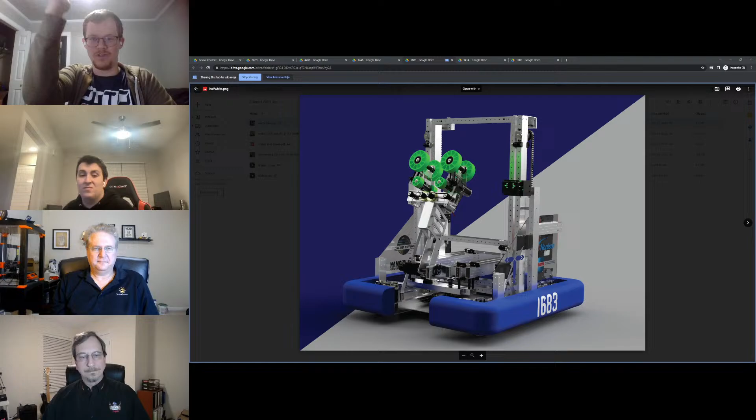Let's go ahead and start off with 1683, since we were talking about them, and they'll be playing at Albany this weekend. I think they just sent in their video from DE today, so we'll get some of that pulled up here. Again, an impressive looking robot - it's kind of an elevator on an elevator design for going straight up, straight down, and then another elevator mounted to it for going in and out, with that wrist and end effector for picking up cones. Seemed like they had that pretty squared away for loading from the human player.

Brian, Thomas, any thoughts from seeing this robot at DE? So they are running photon vision and the limelight. I'm not sure I saw the photon vision on there, but they are running photon vision on a Raspberry Pi.

Really stable, drove smoothly, so I think their speed was good. I think they'll do pretty well there. Agreed. Yeah, it's cool to see a robot working that well, even before week one, where I know a lot of people struggle to have a robot together and ready to go. So best of luck to them.

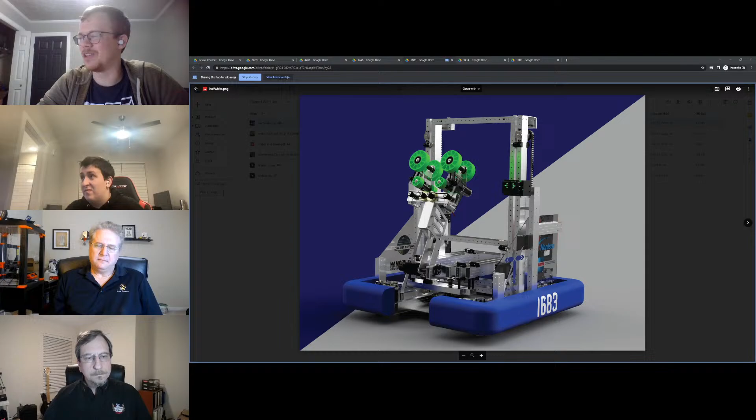Ian, I think they have some more content in the folder. I know they put together kind of a play-by-play list for all the mechanisms, descriptions on what motors, what kind of wheels and things they're using everywhere. We got an info sheet for these, we'll see if we can zoom in a bit for walking through that. But I think the teams seeing them at Albany will get the in-person play-by-play. Yeah, a quality looking robot. Again, I think there's so much to be said for getting a robot done and practiced, so there'll be quite an advantage compared to the majority of the field in having a robot ready to go and ready to play this game.

Any other thoughts on 1683? Did they have a video? Well, they got some video, right? Oh yeah, that's where they had some video from the DE session today. So we'll get that pulled up and rolling here. Yeah, I was recording them because I'm like, hey, they're doing pretty good. Check them out.

I think something to note while Ian is working on getting this video to play is they cannot pick up cones in any orientation off the field. And I'm just really curious - I know we talked about it some in the beginning of the season - when it comes to congestion, if all these robots can only pick up cones when they're perfectly straight up and down, how congested that human loading zone is going to become. So I think that's just something to keep in mind for teams as they're planning out how those matches look.

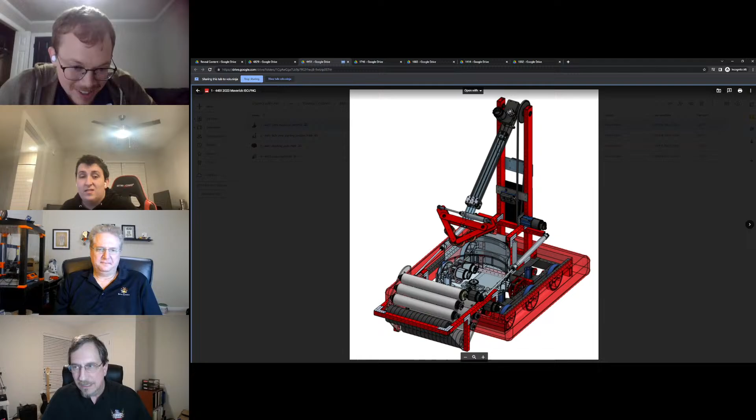Sure, so we are not quite swerve ready for a highly dominant swerve game. So forget the lamenting, we decided that being able to pick up from one side and score out the other side was important.

Some of the original design sketches were insane, where we had an arm on an elevator on a turret, so we could grab it, drive in sideways, and turret the thing out. The number of degrees of complexity just got crazy, and I punted on that.

So then we ended up with this design, and it just happened to be really super duper parallel with the Rembrandts, another really good team out of the Netherlands. If you've never met these guys, they're terrific - team 4481, and their spindexer system.

Our theory is we have an intake that's quite a beast. We can leave it out there, come and hit it if you want to. It's beefy, and we can pick up small animals with that thing and throw it into the spindexer and turn the cone around like we need it, throw it over our head. The cone I don't think we're going to have as much trouble with - it's that stinking beach ball cube.

In our prototyping, what we found out was it's best to handle the cube gently. So we'll only be running the top rollers to bring the cube in, and we're going to grab it in - we're not going to let it hit the spinning platter. We're just going to grab it right out of the intake, because it is a beach ball, if you haven't figured that out yet.

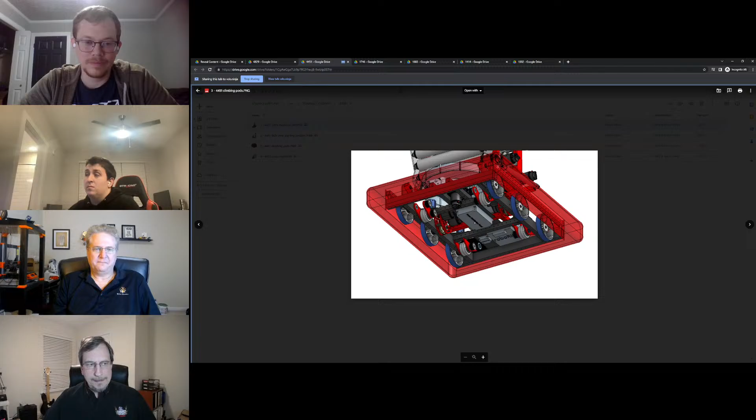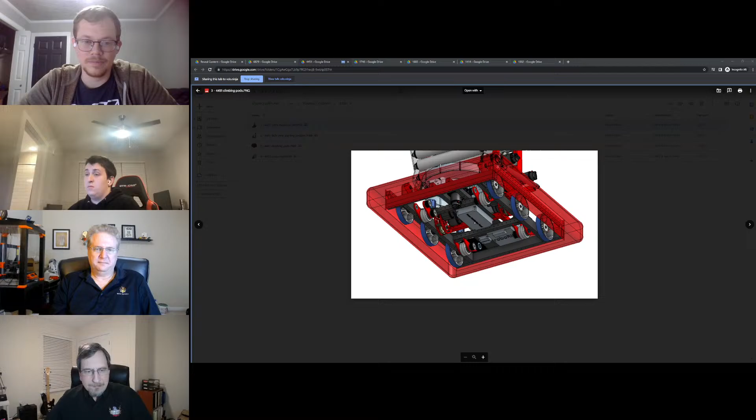This is probably one of the smallest drive bases we've made. But even at that, it's hard to see in this picture - it's a standard West Coast 6-wheel drive, 6-inch wheels, because I didn't like taking my 4-inch wheels over that electrical bump last year. So we went 6-inch wheels, and now we have 3-inch drop down Colson wheels to drive around the bridge.

We're geared fairly fast, so our drop down wheels essentially give us a second speed, a half speed while we're driving on the bridge and balancing. The other feature is we can throw those wheels down in the middle and actually hang off the side of the bridge by driving straight onto it. We can hang off maybe 6 inches or so plus the bumper.

So that's a lot of extra room for that third partner at the world championship level, of course - triple balance or go home. Okay, next picture.

Any questions from you guys?

You all compete week 2 for the first time, right? Anderson, yes. Okay, awesome. Yeah, I think it'll be interesting to see once you get it more together and start seeing some snapshots of the robot moving around. But I think it's a solid concept, and I think we're kind of in a similar boat conceptually - this robot's awesome.

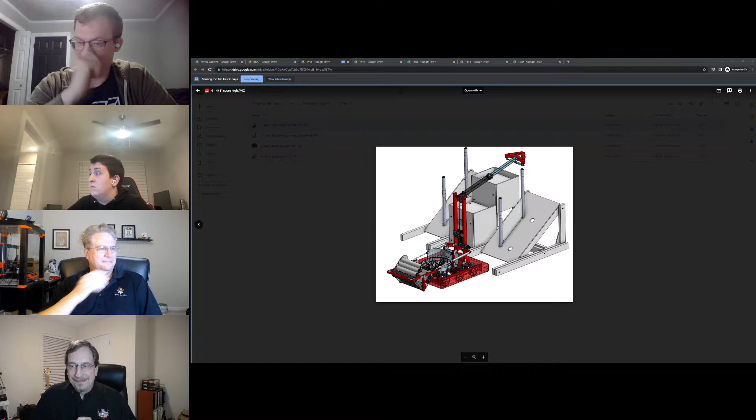Okie doke, sounds like we have video working. Let us know in the chat if you can hear Ian or not. Either we sound like we're crazy or talking to somebody that's not here, so let us know and we'll know if we need to repeat whatever Ian's telling us. So we're either crazy for repeating ourselves or crazy for talking to somebody who's not here.

But it sounds like we've got the ability to get some videos rolling, so that'll help as we keep going here. We're gonna go back to the Titans. It sounds like we're gonna get our video screen up here in a second for 1683, pulling up some of their match video from today.

Can you see the screen? The crowd has reported that they cannot hear Ian. Thanks for letting us know, Sonny.

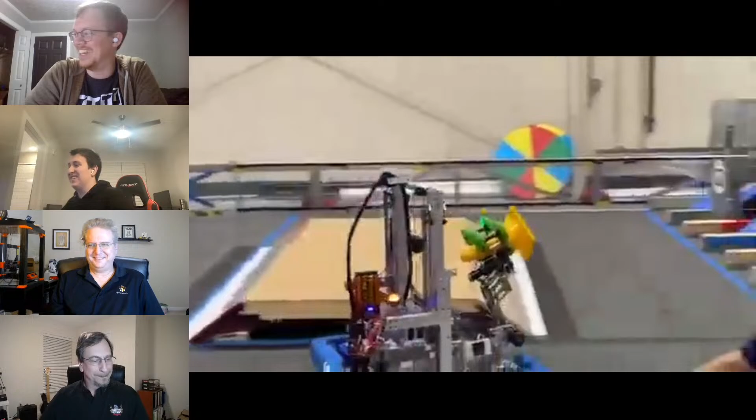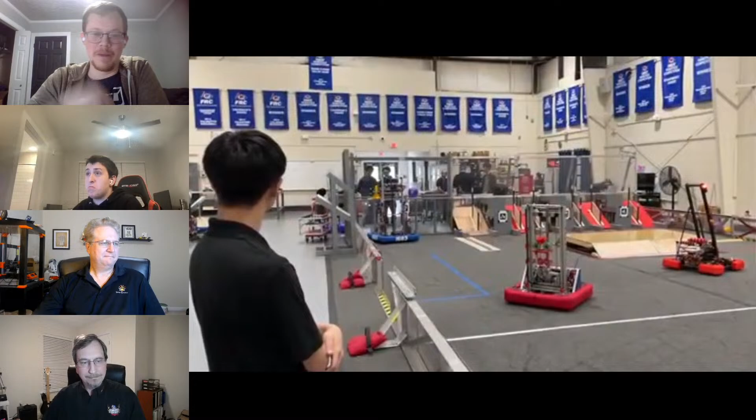We got 1683 running some laps. I don't know if it looks a little bit laggy on our end, I don't know how it's looking on the stream, but it looks good on the stream. You got a couple other robots out there on the field that some of you may recognize, but we'll focus on the Techno Titans here.

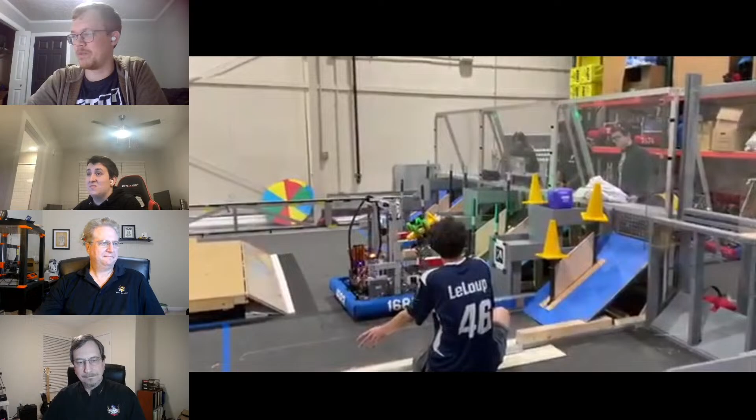They were running clean cycles for grabbing cones from the human player station, lining up pretty consistently it seemed. I don't know if they're using vision for lining up, or they're using the trick like Brian mentioned earlier for the human player kind of sliding it back and forth for alignment. But otherwise they've got that swerve drive, and they do have the robot orientation, so they have to do the 180 every time they cross the field for picking up out of the front, scoring out of the front. But that's not at all a drawback when you can do anything consistently, especially with swerve, just for being able to kind of reorient as you're driving.

You can see him scoring a couple game pieces there. Sonny makes a comment here that it looks like they designed it on day one and just built it. I think there's so much to be said for keeping it simple and practicing the wheels off of it. I like this design a lot.

We got a second video, a shot from the driver station. Doing scoring while your robot's facing you, I think is an interesting perspective for a driver. But there's a lot of complexity and hopefully simplicity in how the drivers are able to control these robots, telling it to score on a particular peg or cube zone, just to be able to line up and be on your way for another game piece.

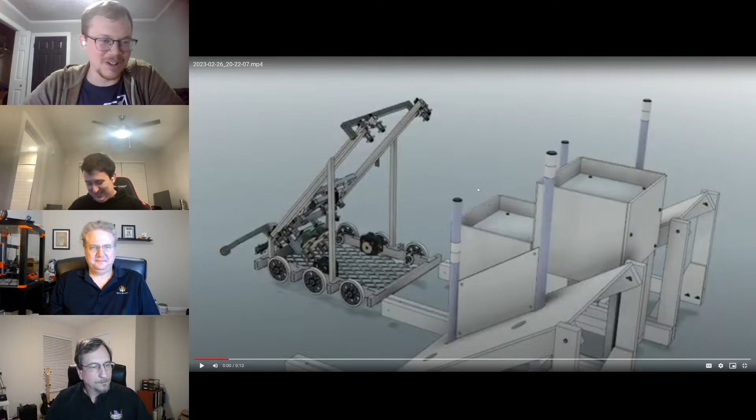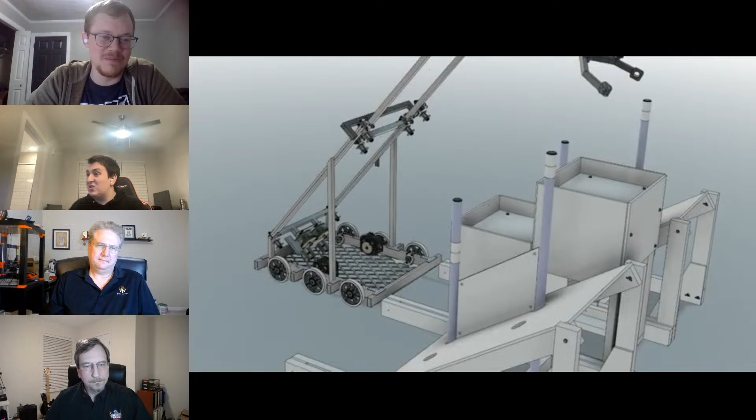Yeah, so we're looking at 1002 here, correct? Yes. Let's see what we got going on here. We got an angled, hard-mounted elevator, it looks like, but then we got a claw extended off of it. It passes through, it's a pass through. That's a fun one. I've not seen that type of design for an elevator going up and then rotating out from underneath in order to pivot like that. So that's a curious design you got there, circuit runners.

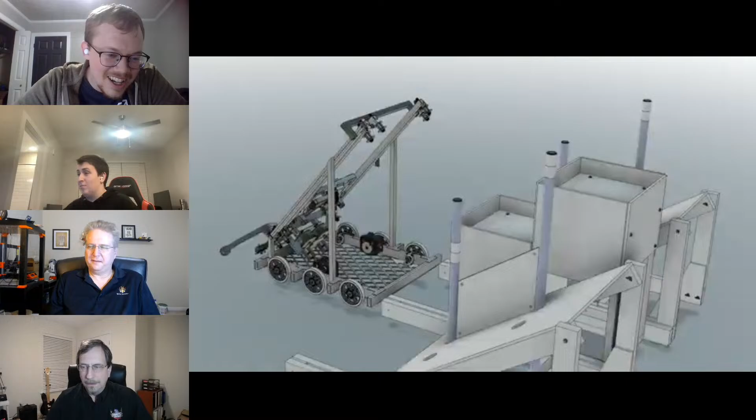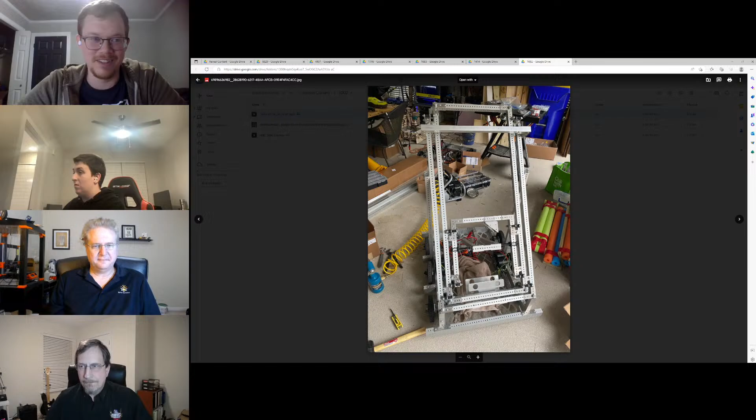I've seen some of their content on the Discord, and they've been fairly consistent all season with this concept. Yeah, I think they're on that same strategy train of kind of pick up off one side and score out the other. So minimizing the turning around aspect of the game, I think, is a good strategy note on this robot.

So it looks like a couple stage elevator for the one longer stage, and then the carriage kind of riding in between with the end effector on it. But looks like 6-wheel traction wheels. I'm trying to tell if an Omni's on one end of that or not. Yeah, looks like they're doing the claw type roller design for the intake.

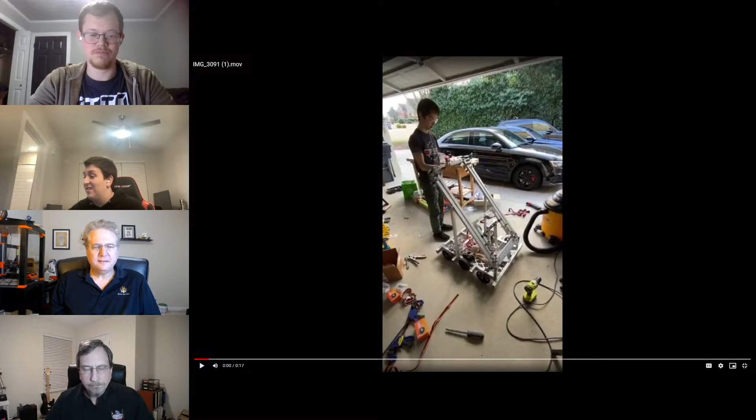Looks like some bumpers getting made there in the background, all taped up. But yeah, interesting looking robot. Let's see, trying to think of when... yeah, they'll be playing in Dalton first, so they'll be playing in a week 2 event. So some progress still to be made, but an interesting concept there by 1002. Looking forward to seeing what they're able to do with this robot.

We're also part of the angled elevator group. We got a few other things going on underneath our elevator, but cool to see another robot. Any other thoughts on 1002? I'm just waiting to see how their end effector works, but the concept is pretty straightforward. I like it. Yeah, we're going to angled elevator also, right? It's a nice, stable design, just support it and it doesn't move.

Yeah, like Ignite, I think you've got the nice steep elevator rail that you can get much longer elevator sections by keeping it at that steeper angle. Yep, ours is a little shallower. We have quite a few more sections to our elevator, so we'll see how that plays out. All right, any other circuit runner thoughts here?

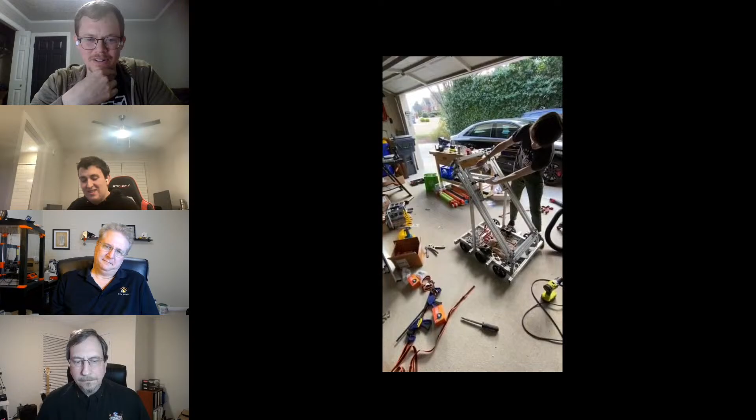Oh, sure, oh they have video, one more video here to check out. Yes, our producer says there's a video, so let's see it. There we go. So we had the animation for this kind of extension, and then we got the walkthrough here. It looks like it might be a pincher end effector, at least from this video, for the two tubes or aluminum tubes coming out. I'm thinking that's just where they mount the end effector onto. I think it's going to be like Techno Titans, where it's got the 2 claws that come out that make open and close and have rollers on it, kind of how the animation implied. Yeah, you can't have it too wide, I think, for still being able to pass back through the elevator rails.

All right, good looking robot, circuit runners. Looking forward to seeing it out on the field.

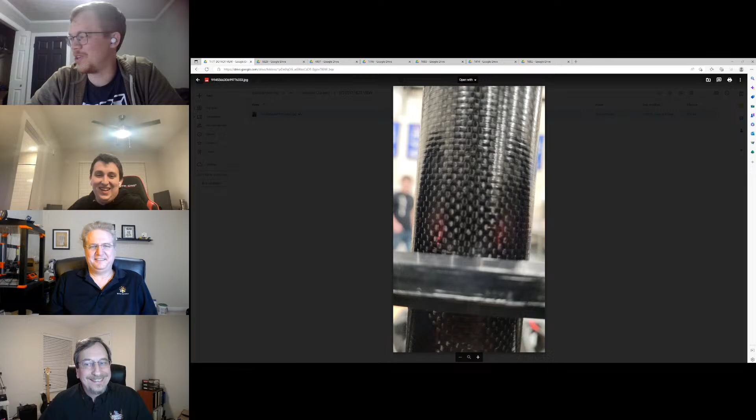So stream, can you hear Ian now? He just spoke. All right, okay, another video coming from 1771, or photo. It's just a photo. It should be in there in that folder, Ian. It's all right. 1771, all right, let's see what their tricks are up to. All right, thanks for letting us know again. Yeah, yep.

That is part of the robot. And it's not wood, it's not wood. It's still natural material, Tom. It's carbon fiber, it's got carbon. Their whole robot is carbon. The whole thing can go up with a match, right? I think they burned all their previous robots, took the carbon made from those fires, and were able to figure out the process of making carbon fiber. So is it technically still a wooden robot then? Yes, clearly. No, it is not. It's got carbon fiber on it, and therefore it is not a wooden robot. Yes.

Unfortunately, now that means the termite-based defense strategy will not work. Yeah, we're gonna need some mutations in the termites we've been breeding, Thomas, to properly eat this robot. I don't think they're gonna be near water, so we can't use their spritz bottles either.

In an unrelated note, I have purchased three humidifiers in the last week or so. So, 1771, you guys, look out.

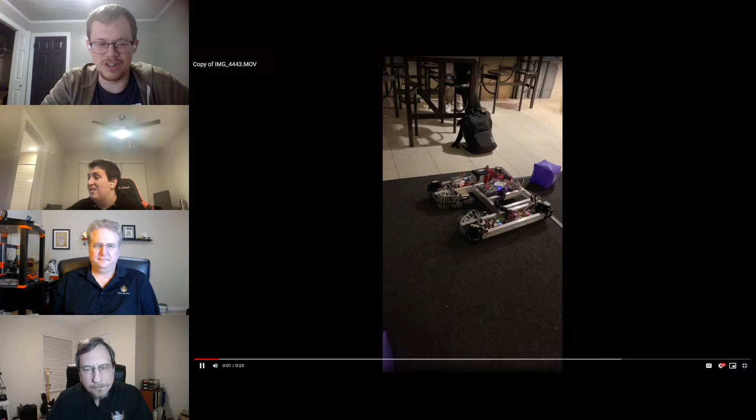So this looks like just their drivetrain that we've got here. So this is, I think, some of the video then, just pulling in the base first. Oh, I see, kind of, but it seems like they have an option to just drive around on the field with the game piece still on the carpet. I'm curious how often they'll do that, or how often they'll wait to get back to their home zone to then flip it up in the air.

It's a really interesting intake. I think we have some better pictures at some point, but I don't know if they're custom made or if I've seen similar wheels out there. They're kind of wrapped, so it's a wheel full of edges, obviously made out of rubber.

Do I think they printed those out of TPU or something? There's some chance of that, or if you get the right rubber, you can water jet it. I know it makes a whole lot of a mess, but that would be another possibility there.

Yeah, it looks like they have a whole boatload of that wheel type kind of just sitting right inside of a cutout bumper.

Looks like they could pick up that stool.

I think this video is showing that side to side motion just to be able to toggle to the next goal over, which I think is awesome to see that kind of capability for a driver to just say bump over, score. That's really going to aid in a driver scoring consistently and having those controls. Good looking stuff there for the controls on that drivetrain.

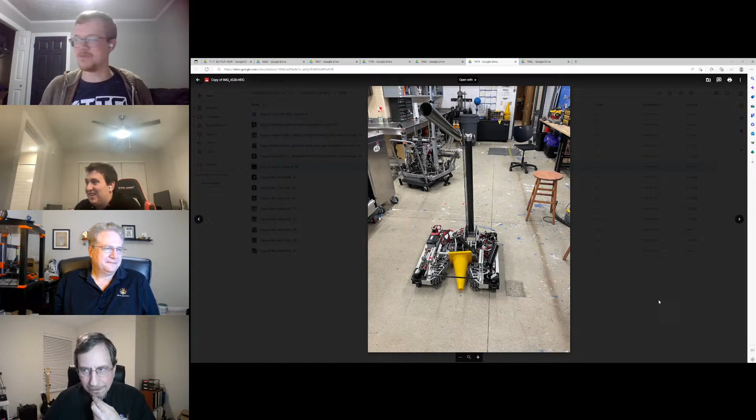We actually have a former PCH member and current 971 mentor in the chat, Andrew Morris. I think he wasn't with 971 in 2018, but I'm sure he's heard plenty of stories about the build of that robot. Some interesting flashbacks here for a really cool robot from the 2018 season. But the 2 PCH teams are trying out this carbon fiber arm, which I think is going to be a really interesting season to watch.

From what we're seeing here, it seems like 1414 is still working on finishing up their robot. Obviously some good progress, and I don't think they play until week 3 at Gwinnett, so 2 more weekends to finish. It's time for those refinements we're looking for in a good robot.

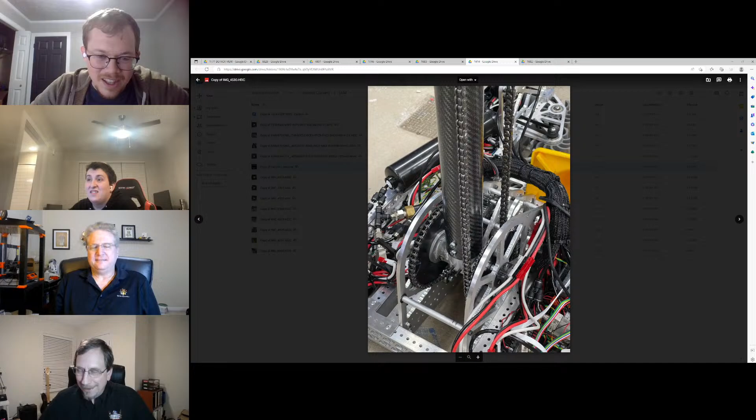So that one's going to have a low center of gravity. Yeah, balance. That is really a beautiful robot. Well done, guys, really awesome to see.

It'll be really interesting to check it out in person just to see how everything is packaged in such a low layer. Interesting what the pneumatics is for.

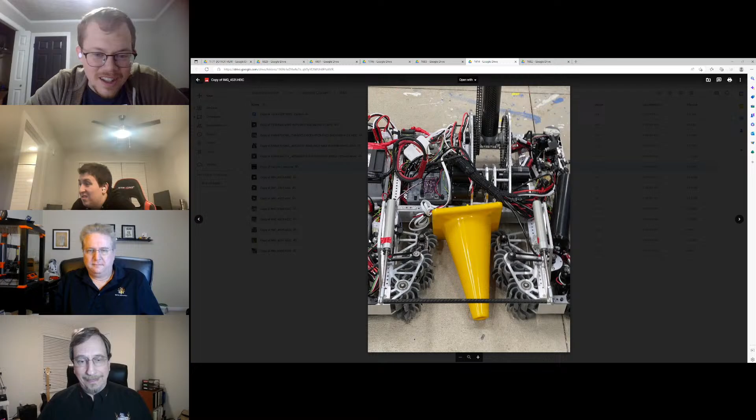So these are those wheels I was talking about for the fin-shaped design, I like that. But the pneumatics, I think, is a knockdown bar, so if the cone is upright it just knocks the cone over and pulls the base in. I'm assuming it would help a little bit with the cube not going up when they hit it with those rollers on the bottom. I'm guessing, I'd need confirmation from them, but that cube, it's a beach ball.

Yeah, looks like you can see their battery standing up there on the left. Looks like the arm's a little bit offset, or the base arm is offset to one side, but that would make the top arm central on the robot.

It's beautiful, that's beautiful. I'd like to give a shout out to the poor electronics team on 1414 that just has to squeeze all of those electronics in as little space as possible. I've been there before and I know the struggle, so well done on squeezing it all in.

Those teeny little drop belts on their intake wheels are pretty cool too, teeny little things, very nice.

I'd be curious, I think it'll be interesting to see how the robot's driven. I'd imagine the end effector would be able to pick up out of the human player station if they really wanted to, but I imagine it's primarily off the floor. Assange is there in the chat and can correct me if I'm wrong, but he says it's physically impossible to fit a roboRIO and PDH on our belly pan. Well, I've got some unfortunate news, you need both of those things.

Since you don't have an end effector, you got some room up there. Yeah, put it on the end. Just carry the roboRIO around and use that as one of the pinchers to hold the game pieces with. You could put an AprilTag on the back of it.

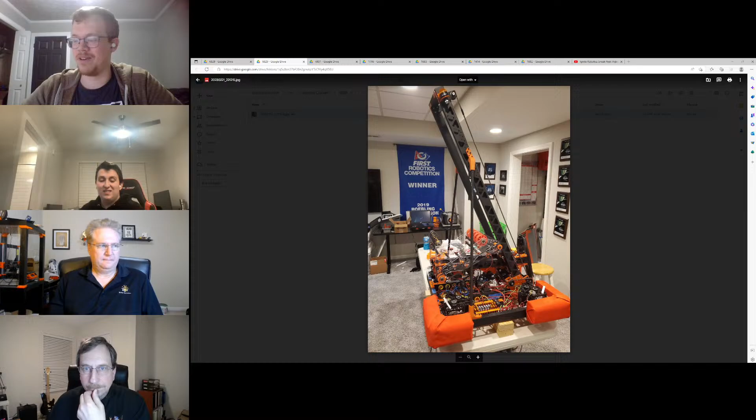Again, huge shout out to Nathan. Being there at DA today got kind of a preview of this getting posted, but I think they'll wind up getting it posted on their team YouTube account. So make sure you check that out. It's very well produced, especially within the matter of a couple hours for shooting video. But Brian, I guess, walk us through the robot.

So we started out with a couple ideas behind this, which is low center of gravity, right? You can get some tall robots, and we wanted to be low center of gravity, and whenever possible we wanted to do linear motion, something that's a little more controllable, stuff like that. The students went through and did some mock-ups, blocked CAD diagrams of an elevator type system, or then a shoulder with an arm kind of system.

And we ended up going with elevator just to try to keep reducing complexity. We used the Thrifty Bot elevator that they have, and we narrowed it a little bit smaller, but used all their parts. Went through several iterations trying to get all the custom stuff in there, switched over to COTS to save time so we can have more time to do programming and driving around.

We put, let's see, the arm can actually extend out. I'm not sure if I have a photo, but anyways, so the intake comes out and the arm extends out. We actually found out today that we don't really need to extend the arm to get to the high cone. We still have to play around with geometries to get that to properly score.

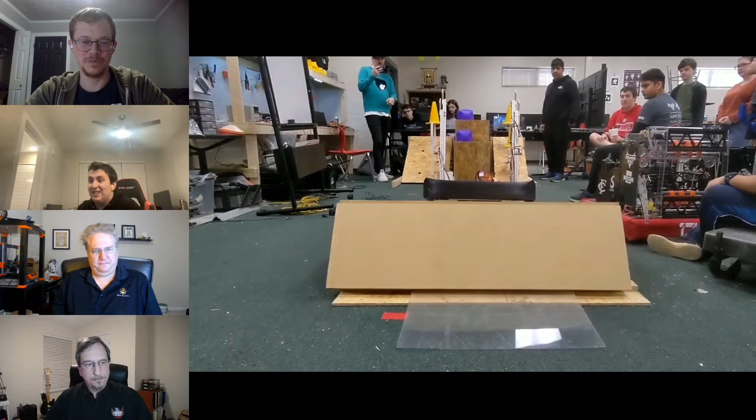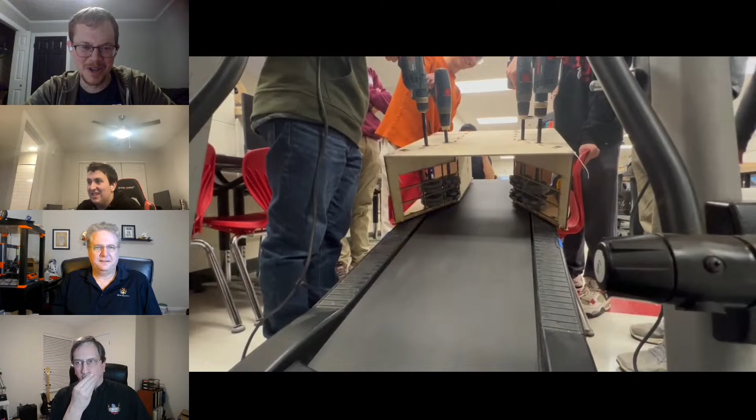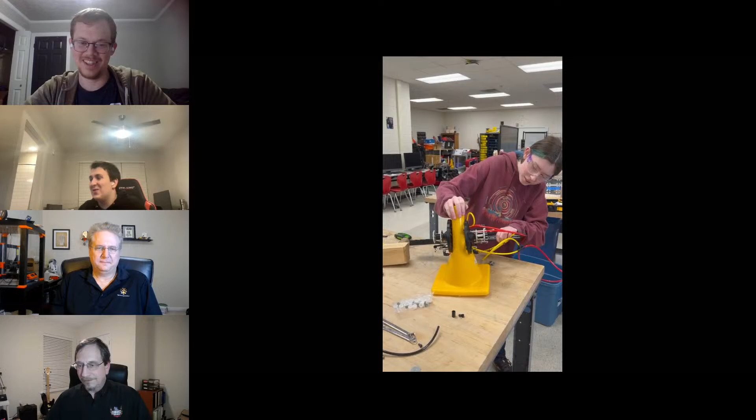Yes, we prototyped our indexer on a treadmill. That treadmill belt is on our current robot, so it may or may not be up to 10 years old. Who knows?

But yeah, showing off some of our cool features, as well as some of our more questionable features.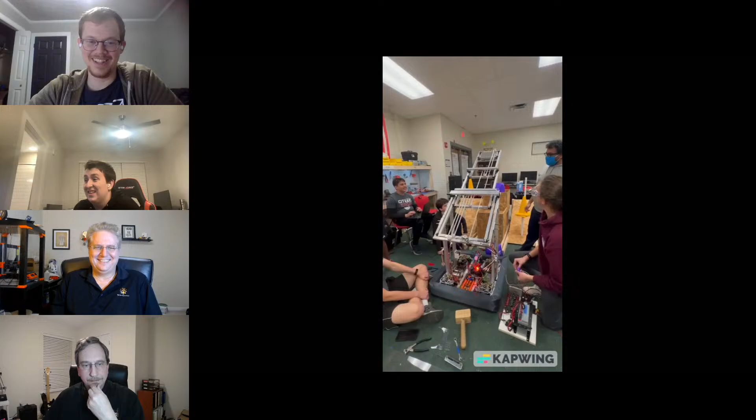This is some of our initial testing, I think, moving the elevator in and out. In the shop, we had a big round of applause or cheering as this happened, and then some technical difficulties were had.

If you were around in 2018 in Dalton, you may be familiar with 1746's famed Wonkavator, which goes up, up, out, and away, I think is the saying. We had a sponsor do some work on bearing blocks, but we hadn't quite gotten them in yet, so we had some 3D printed ones in there as placeholders.

But in testing the elevator, anything closer to full speed, we had some tragic memories brought back from the 2018 event, where we wound up shooting our elevator up and through the hard stops, and it kind of went up and out of the robot and fell down.

We did it in the shop and not on the field, so we know what we're doing.

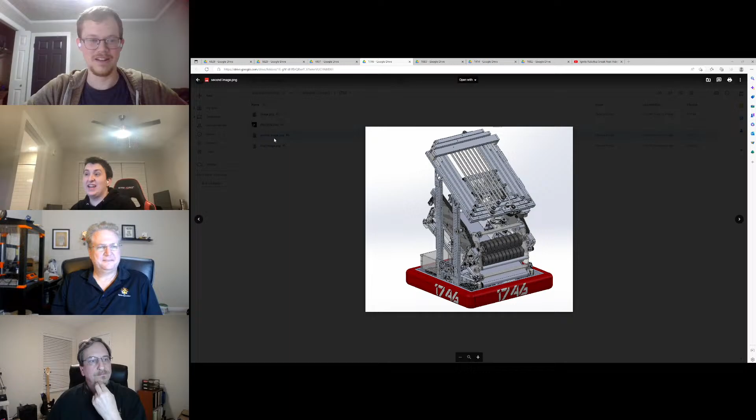Brandon King is asking if the elevator is continuous. The answer is yes. We have about an 18-foot long belt running on the back of that elevator. Ian, if we can go to the pictures, I think picture 2 is the best one, the second image.png.

Yeah, so we've got that same kind of intake as 4451, 4481, but we have it on a telescopic-ish, kind of linear rail setup that you extend, with a linkage off at the end of it. I'm still not entirely sure about it myself. We'll have more once it's on the robot, which is happening this week.

Does the conveyor come outside the bumper, or does it stay inside? No, the conveyor is entirely static. Yeah, completely static.

And it has, I think we saw in the video, a line of omnis where we can pick up a cone in any orientation on the floor, and it just fixes it as it goes up.

Yeah, and so the cone can come in either direction. A lot of you, I imagine, have seen from the Robot in 3 Days videos the pinch and then swing scoring mechanism. So the cone can come in either way, and we just pinch the center of it, and the bottom swings to the appropriate orientation for the elevator to extend with it, plunge, and then release the game piece to score it on the scoring peg.

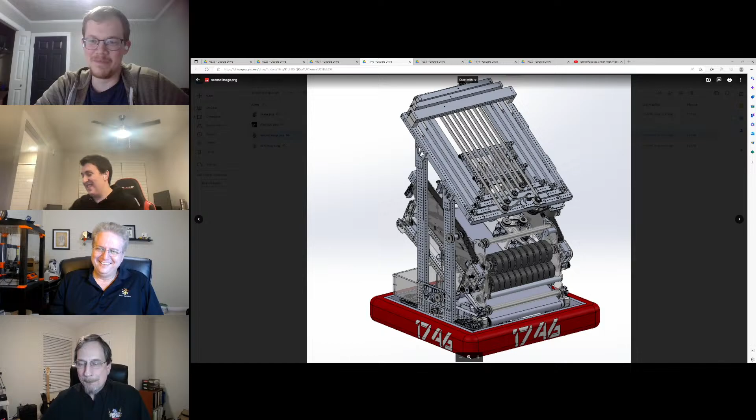So I'm curious, last year you used exercise noodles, right? And this year you got a treadmill. You're going to use a power rack next year? Yeah, we're just encouraging physical activity. People say FIRST Robotics isn't a sport, but we're trying to change that mentality. When Ed Barker said STEM gym, he didn't mean a real gym. Team OTTO, sponsored by Planet Fitness.

One of my ideas for our reveal video involved a close-up of the treadmill belt with little shoes running along it, then zooming out to see. But it was pretty silly, because we brought the treadmill into the shop for prototyping and set the prototype on top of it at a steeper angle.

And this was just a concept. We thought, we'll give this thing a shot. And it wound up working out real great. So I think in the reveal video, which will be on our YouTube page, you just hear the shock of like, wow, this thing's actually working. So that's something to point out.

When we were first looking at our designs, we were thinking about the claw type design, and we saw Spectrum doing the roller stuff, and said, let's just try it out. And it's like, wow, that seems to work pretty well. Sometimes you just try something and see what goes with it. It's interesting to see what rabbit holes people run down, just like, oh, this seems promising, let's run with it.

But the design philosophy, I think, is comparable to 4451's robot, for the same style intake, but get the game piece in the robot. You can work on indexing it while you're driving across the field. You don't have to worry about aligning to a human player station in a particular manner, it's just full robot width. Our frame perimeter is pretty small at 25 by 25, so not tiny but not big by any means. But it makes it as easy as possible to just run into a game piece. We don't care if it's tipped, sideways, or what orientation it's in.

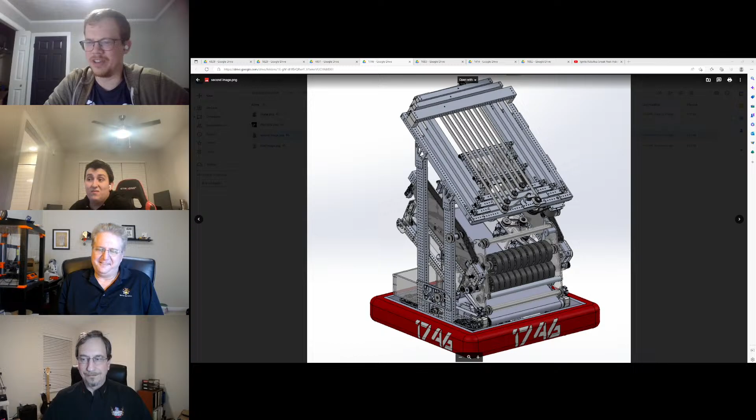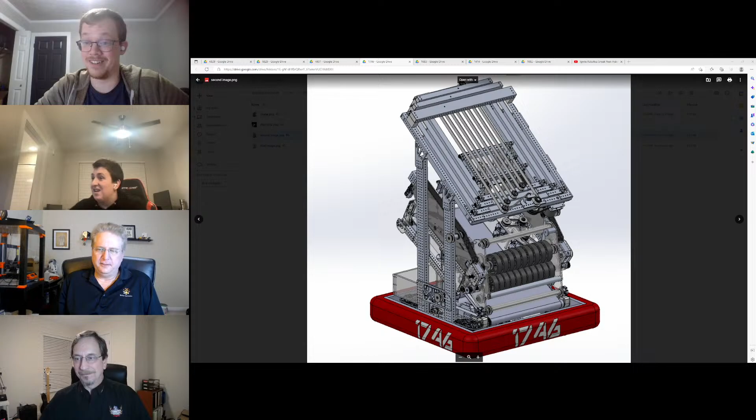A couple of people mentioned it in the chat, but we saw the 1690 reveal video, and we're watching the cube launching. We're like, you know what, it wouldn't take that much of a change to this indexer to just be able to drop a gate and shoot the cube out the end. So, with or without the elevator. Without the elevator. I think, Ian, if you go to the other photo, the one titled just 'image', you can better see the gate that drops down. If you zoom in, at the end of the treadmill we have a little pneumatic gate that sits down there that the game piece runs into.

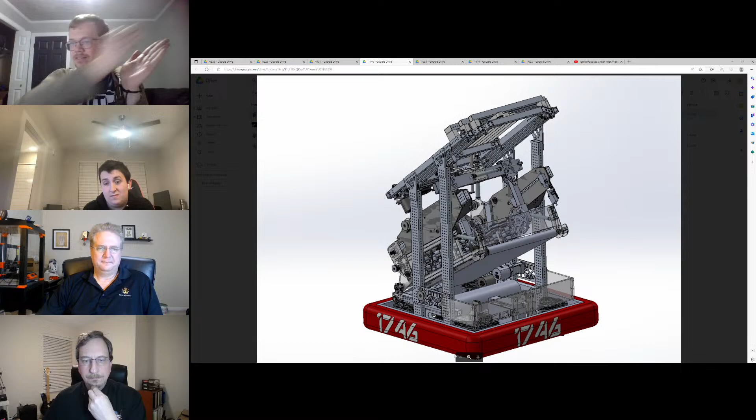You wind up pinching the game piece, but then when you go to actually score, we drop the gate, the elevator goes out, comes back in, gate goes back up. And then when we're scoring low, instead of it going out of the elevator, we just drop the gate and shoot the piece off. So we'd have the option there to spit it out the intake as well. But as Thomas mentioned previously, that would involve doing a 180 in order to spit it out low and on the floor.

Some things to check out, how they work in reality compared to the plan in the mind. But we'll see how it goes. Yeah, it could be interesting. I saw 1683 working on their auton, trying to do a few pieces. So I'm kind of curious, with all this movement and all these robots, where's the three robots supposed to go?

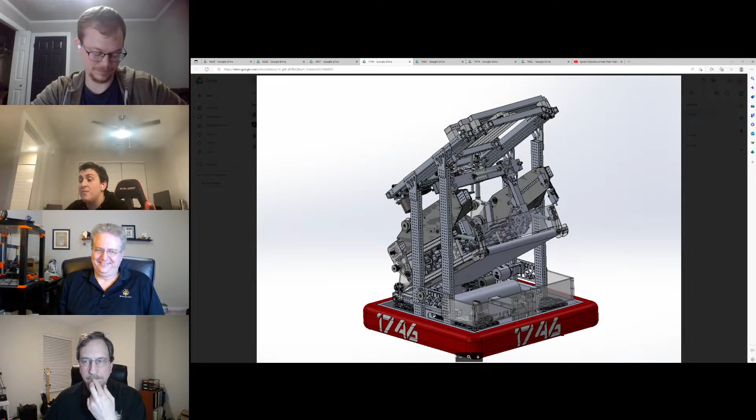That's where I spoke to you, Brian, about this. But in my opinion, the perfect third bot auton, if you can figure it out for elims, is being able to score your first cube and then balance. I think if you're planning on being a third bot and you can get that, you are golden.

Bonus points if you're able to go up, over, fully exit the community zone for that extra 3 points, and then balance on top of it. That's what we're going to see third bots doing, especially at state and worlds. At district levels, any alliance captain is going to be incredibly lucky to get one of those robots that can balance in auton. It's a huge scouting detail to check for if a team can balance in auton, so you can say, you take care of that and we'll score as many game pieces as we can. That really opens a lot of doors.